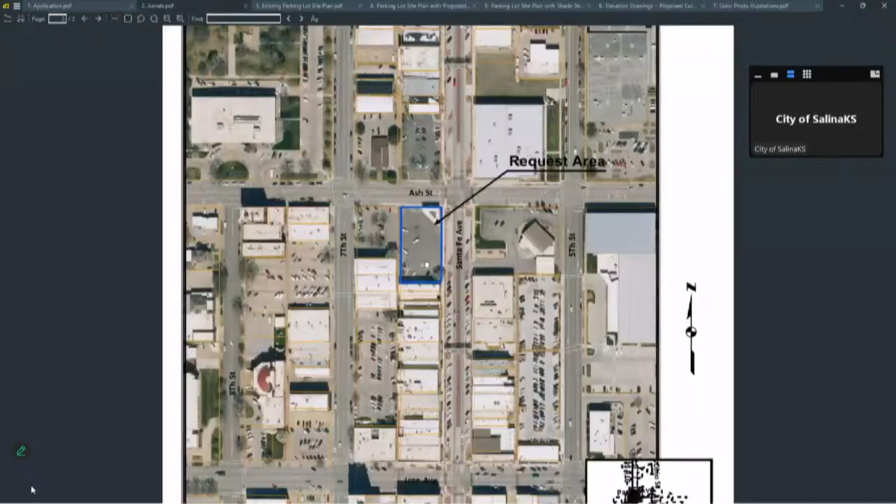The 100 block of North Santa Fe was formerly occupied by buildings from Iron Avenue north to Ash Street. In the early 1970s, the Salina Urban Renewal Agency began acquiring the buildings, and the buildings at the north end of the block were demolished in 1973. In February 2002, the Salina City Commission authorized the city manager and city attorney to negotiate a real estate exchange agreement with Sunflower Bank, which allowed city-owned surplus property at the northwest corner of Belmont Boulevard and Ohio Street.

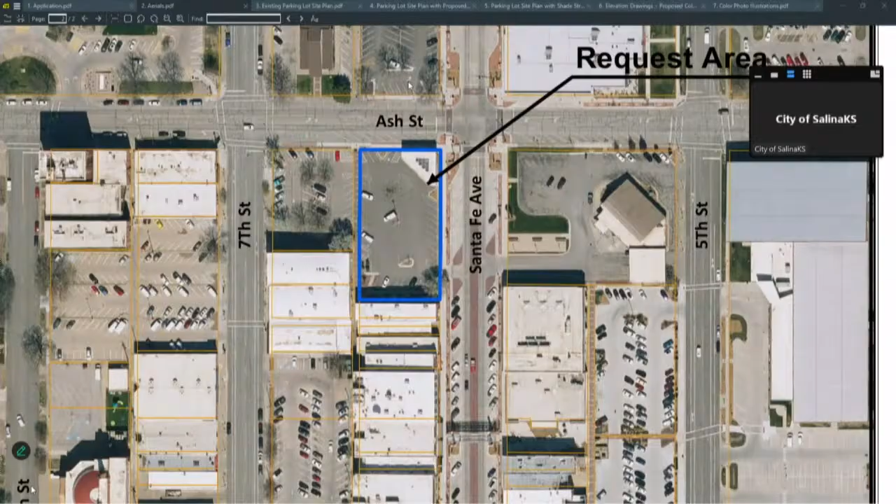for the Sunflower Bank owned parking lot at the southwest corner of Santa Fe Avenue and Ash Street. The surplus city-owned parking lot is now part of the parking lot serving ComCare, and this parking lot is now owned and maintained by the city. The City of Salina Engineering Division submitted a certificate of compatibility application in the fall of 2021.

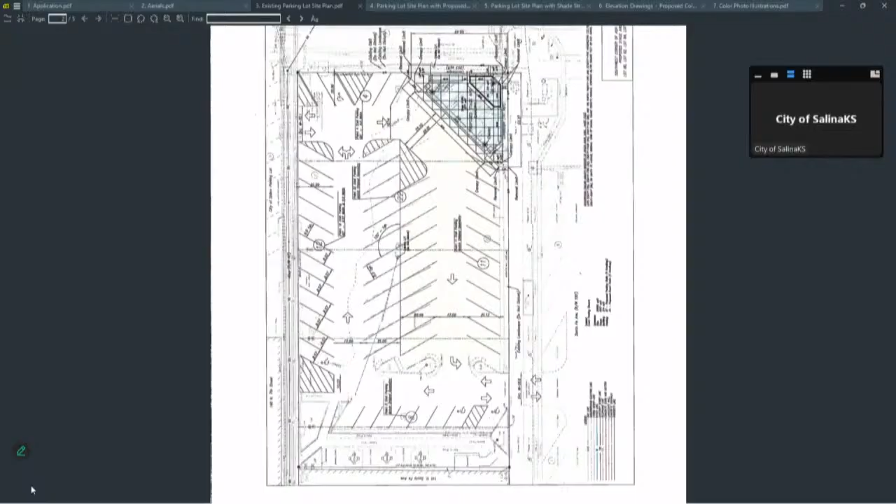The application and plans submitted to the Design Review Board proposed the removal of the Campbell Plaza stage and relocation to what would now be known as the City Light Stage at the location of this parking lot. Plans included an elevated concert stage and a storage building that was incorporated into the stage structure. The Design Review Board approved the relocation of the Campbell Plaza stage on October 14th, 2021.

Since the relocation, the City Light Stage parking lot has become a location for special events, including Salina on Tap, the Salina Farm and Art Market, and the post-race event for the Crossroads Marathon. The City Planning Commission met in March of last year and considered a request from Leslie Bishop on behalf of Salina Downtown for approval of a special use permit to allow a weekly open-air market or farmers market to be located and operated in the parking lot.

The board approved that request 7-0, and the Salina Farm and Art Market has operated from the City Light Stage parking lot for the last 2 years. Salina 2020, the master developer for downtown Salina, is proposing to make substantial and permanent improvements to the City Light Stage parking lot. The parking lot is located on the southwest corner of Santa Fe Avenue and Ash Street.

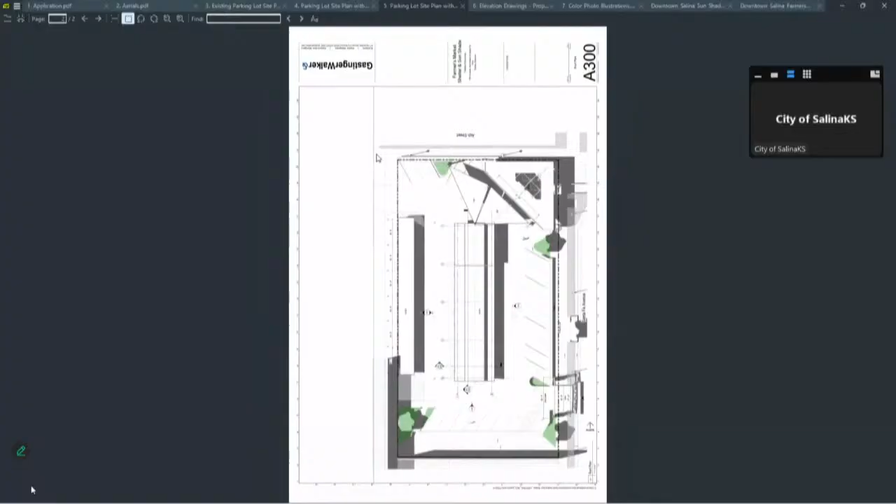The parking lot serves as the congregating area for events taking place on the stage, including the farmers market and other special events. We will cover the proposed improvements in more detail as part of our staff analysis, but on pages 4 and 5 you will find the design guidelines and the references they make to the proposed improvements, which we will go into in more detail as part of our staff analysis.

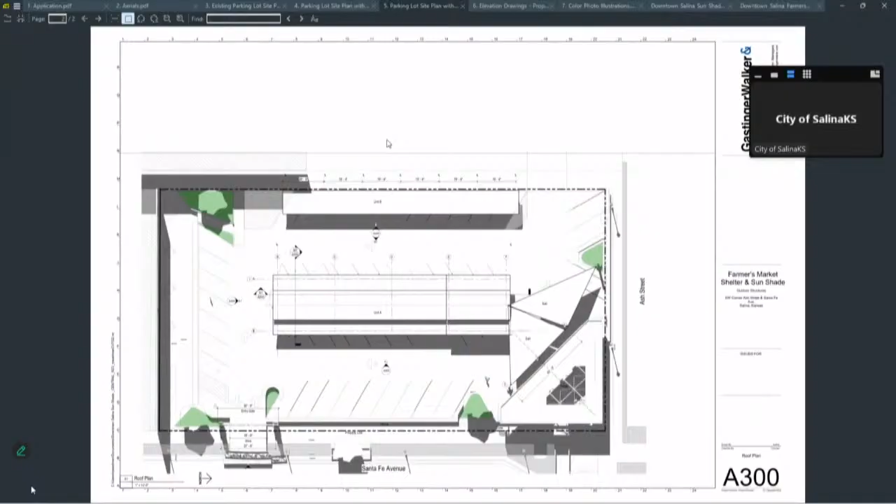Starting on page 6 of your staff report, I'm going to attempt to go through each part of the project individually, and then if you have any questions, we can cover those at the end. We'll start with the shelter structure. The largest improvement being proposed as part of the project is the installation of 2 steel shelter structures. Structure A, located in the middle of the parking lot, is 115 foot by 26 foot, a 2,996 square foot structure located in the middle of the parking lot.

The structure will be 15.5 feet tall in the center and 9 feet tall at the eave of the structure. The structure will be constructed out of steel.

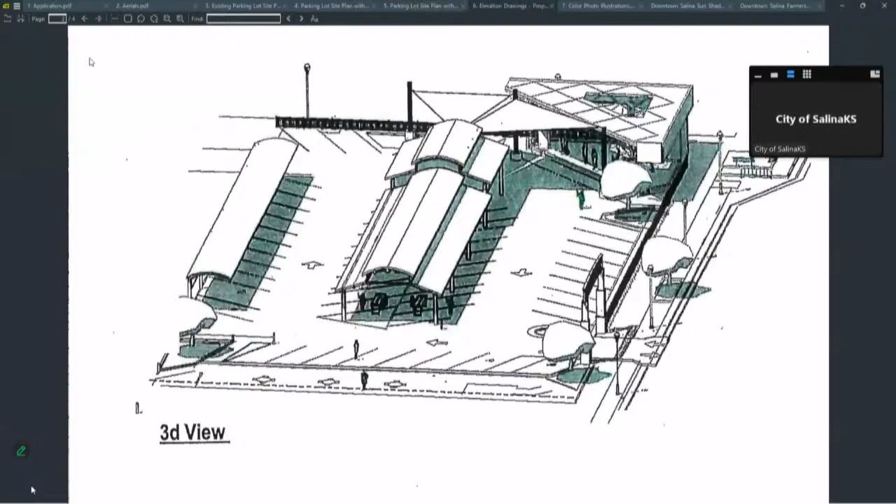The structure will be a green-blue color and will have a curved roof that is green on the exterior and wood material on the inside of the roof. Under the roof will be 4 fan units, as well as a series of wall-mounted lights, including...

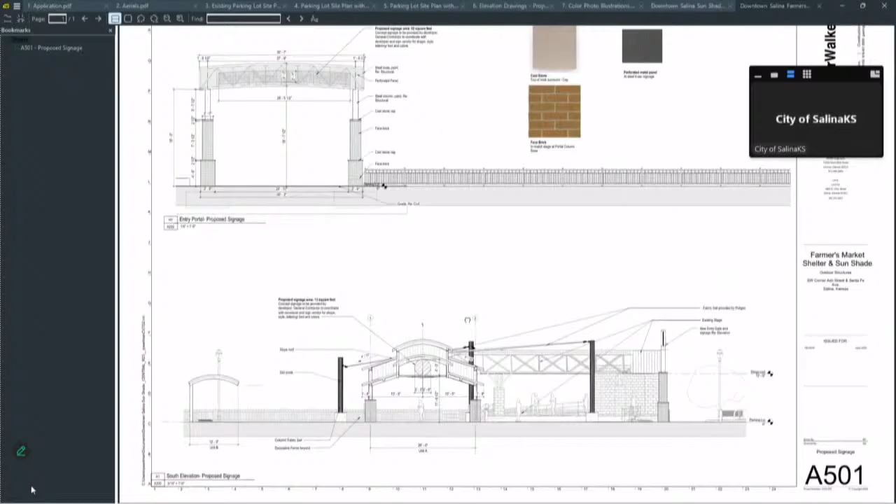18 8-foot-long rectangular lights and 24 cylindrical lights. Structure B is proposed to be a cantilever design structure that is 119 feet by 12 feet, or 1,428 square feet, located along the west portion of the parking lot adjacent to the alley.

The structure is proposed to be similar in color and configuration to Structure A. Structure B will have 5 lights located on the underside of the structure.

Following the packet being sent out, further conversation with the applicant and engineers ensued, and the applicant has indicated that with the cantilever structure being 12 feet in width, they are hopeful that the support pillars can be small enough to fit on the far...

That's the east side, the far west side. Far west side of the parking lot, and that they will not encroach into the alleyway.

The applicant has indicated that if they find the support structures do need to be modified, the cantilever nature of the structure may change, but the general design, lighting, and materials will remain the same.

The applicant has also indicated that the support posts of the shelter structure will have brick and cast stone bases that further complement the entry portal, as well as the materials used on the City Light stage.

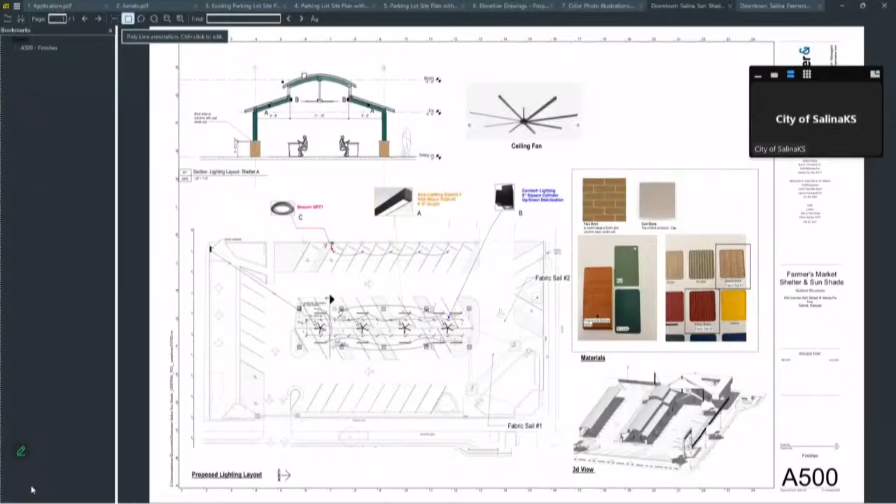Originally they were just going to be what was provided in your packet, just the metal structure all the way down to the ground. Ms. Kitchen has since indicated, as you can see in the top left of your screen, that they will be brick and stone at the base of the structures.

Next, we'll talk about the fabric shade sail structure. The second element of the proposed improvements is the installation of 2 overhead fabric shade sails to be located between Structure A and the City Light stage.

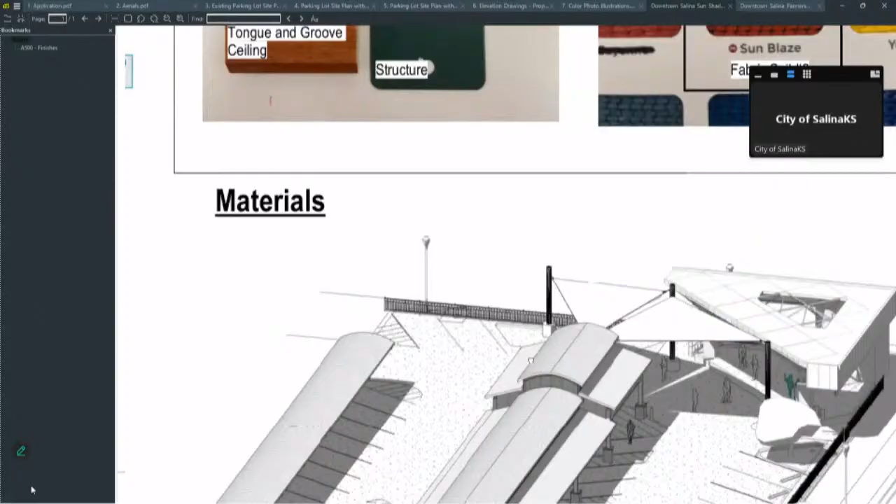The fabric shade sails are intended to shade the sun for performers on the stage and provide further location for people to congregate. The sails are 19 feet in height and will be a dark red and light brown color, respectively.

The sails appear to be compatible in color and scale to the rest of the elements currently installed and proposed for the City Light stage. The sails would also provide another point of gathering for pedestrians using the parking lot and would appear to also provide an element of shade for those using the stage.

In our staff report, we requested that the applicant provide more information on how the fabric sails will weather, and the applicant indicated that in order to preserve the fabric, the sails will be removed in the wintertime and put back up during the spring, summer, and fall months.

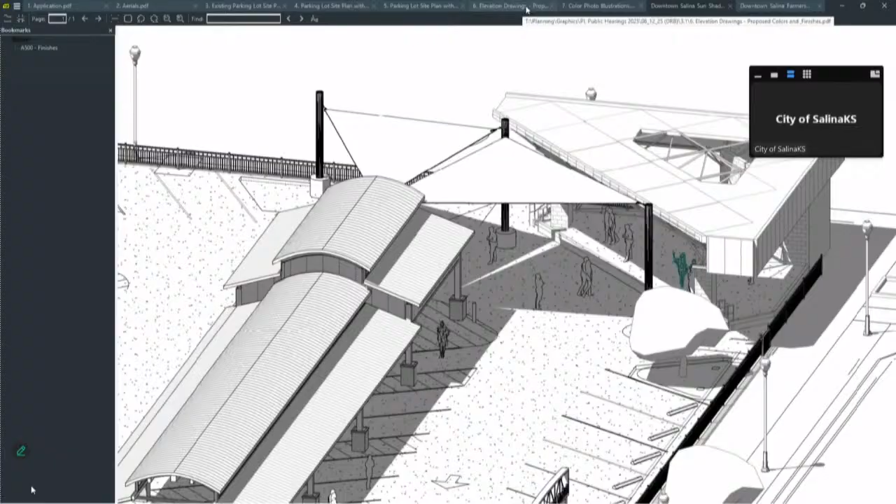As part of this project, the applicant is also proposing to install a black wrought iron fence around the perimeter of the parking lot. The fence will have 2 decorative pedestrian gates on the north and east sides of the lot.

There will be a 30-foot or 24-foot without the pillars of the entry portal opening for a new proposed entry portal located over the existing curb cut on North Santa Fe.

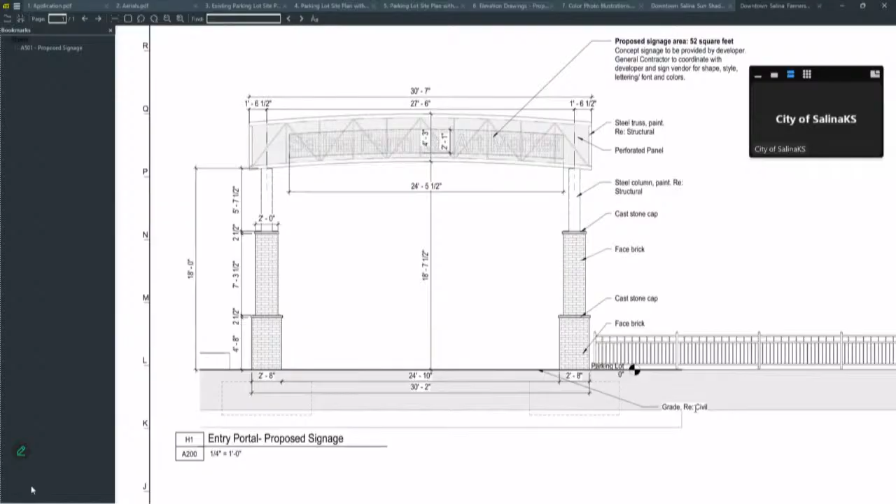The fence appears to be similar in color to the fence used at the KU Nursing School across the street, and the fence will additionally help further enclose the space, which can help facilitate more intimate events and gatherings.

Next, we can talk about the entry portal. The applicant is proposing a new metal and masonry entry portal over the parking lot entry off of Santa Fe. The entry portal will have a masonry base on either side of the entryway with a black metal archway extending across the entry to the parking lot.

The archway will have a space for a future entryway sign, which we'll talk about in our next section. The proposed entry portal is 30 feet in length, and if you subtract the size of the brick pillars, it would be 24 feet in length and then 18 feet tall.

The masonry and metal materials, again, appear to be similar in character and design to that of the existing stage and that of the proposed base of the shelter structures. The entry portal does not appear to interfere with entry or exit, as it extends well past the current curb cut.

Currently, next we'll go to signage, and we'll stay on this graphic as well. Currently, the applicant has identified locations where future signage could be placed. The applicant has since provided information on the proposed signage.

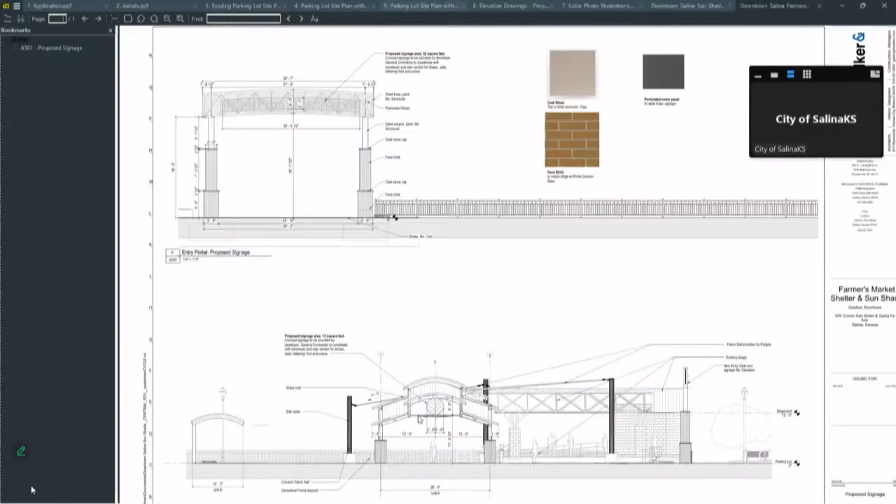Number 2, the applicant is proposing 2 circular panel signs to be located on structure A. The signs would be 13 square feet in size and would again be similar in material and design to the proposed renderings, and they would also not be illuminated.

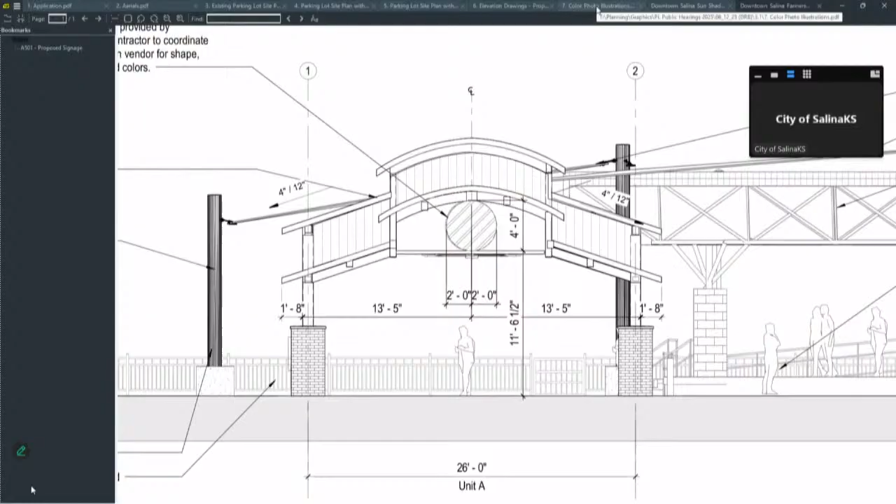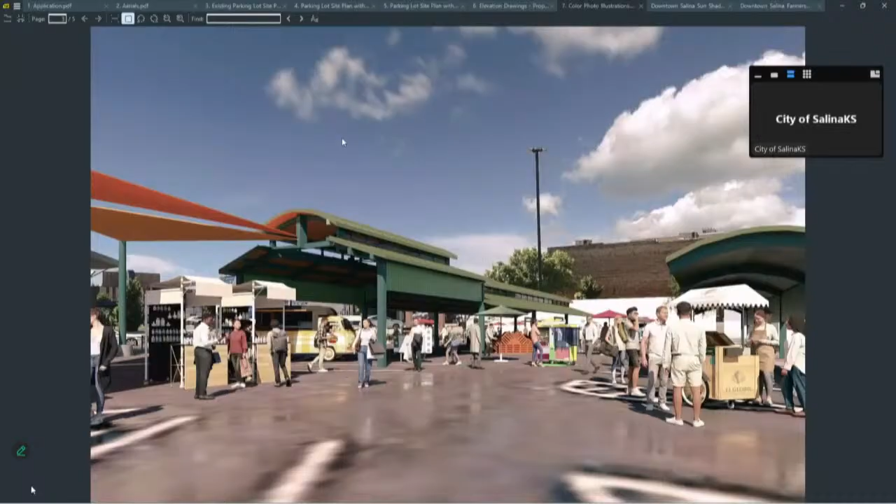As proposed, the total sign square footage would be 78 square feet, which is well under the 342 square feet allotted for this property. If the board wishes to approve the signage as part of today's proposal, staff would feel comfortable with the condition that if there are any significant changes to the proposed signage, whether the material drastically changes, whether they were to be illuminated, or the size were to change, that they could be brought back to this board at a later date. But it would be your discretion, and we feel comfortable with the details Ms. Kitchen provided that the signage could be approved as part of the application today.

Just to clarify, are those circular signs, one at the south end facing south, the other one's at the north end facing Ash? Correct. They would be on either end of structure A, as Dustin's pointing out on the screen.

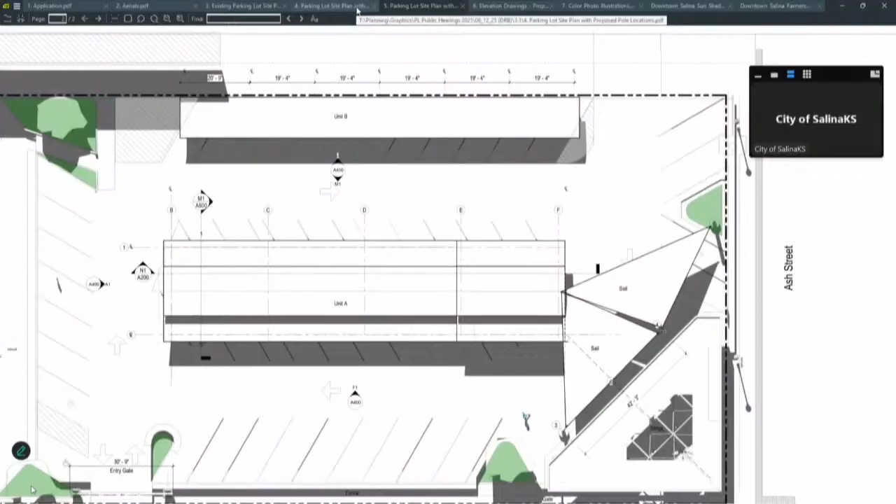And the last thing we'll talk about is the parking lot configuration. The existing configuration and layout of this city-owned parking lot provides 57 marked spaces. As proposed, this will still be a multi-use public space with the parking lot use continuing when the lot and shade structure are not in use for special events. Due to the design and location of the center shade structure and the location of the support columns, the number

of parking spaces in the center row of stalls will be reduced from 22 to 15 stalls, but these stalls will be covered parking spaces. The current plan is to maintain the parking stalls along the west edge of the lot, with the loss of one space for the cantilever structure of Structure B. The plan is subject to change. However, the applicant has indicated that with the smaller supports needed for a slightly smaller structure, the hope is to retain all of the parking spaces to the west except for one space.

So in review of the project for compliance with the design guidelines, it appears to staff the following findings can be made to support approval of the proposed improvements to the citywide stage. The design and materials of the proposed shade structures are consistent with their intended seasonal use and will not negatively impact the character of the surrounding area.

The proposed shade structures will be visually compatible with the existing citywide stage. The proposed shade structures will be compatible with the buildings adjacent to the intersection of Santa Fe and Ash as to style, height, scale, materials, and setback.

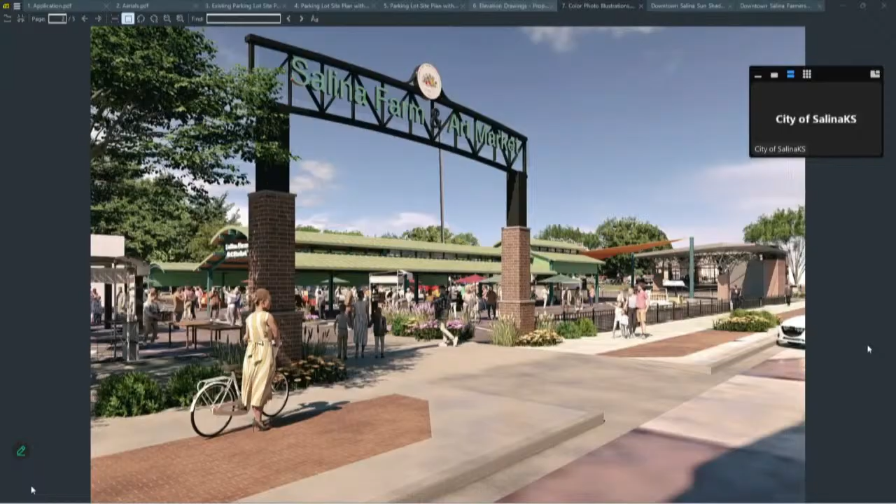In this current design, as proposed, I've spoken with the manager of facilities for the city to go through what is needed. On the electrical side of things, we have designed the lighting, the fans, everything to be customizable, with dimming capabilities, timing capabilities, so that the city and or a user in the space can set up the space how they need it to work for them.

Also on the sails, as indicated, it's really pretty simple—just yesterday with the facilities, we showed them the attachment process. It's a very simple carabiner-like structure to come off and on, so for them it would be a very simple step to do. On the cantilever structure, as Gage indicated, until we have a few more answers, we're hopeful that this will work. In a worst case scenario, we may or may not need some supports on the eastern part of that, which would require the loss of a couple more spaces. But we're hopeful that this amended design will work with that piece.

Related to some of the public comments that came in, I just wanted to speak candidly about a couple things. One of the comments was about having more fabric shade, and as indicated, we felt like that would put a lot of work on maintenance by staff, and we were trying to minimize that. The other part is that the public comment also said having more shade—if we add more shade, we lose more parking. So this is trying to find a balance that works for all people involved.

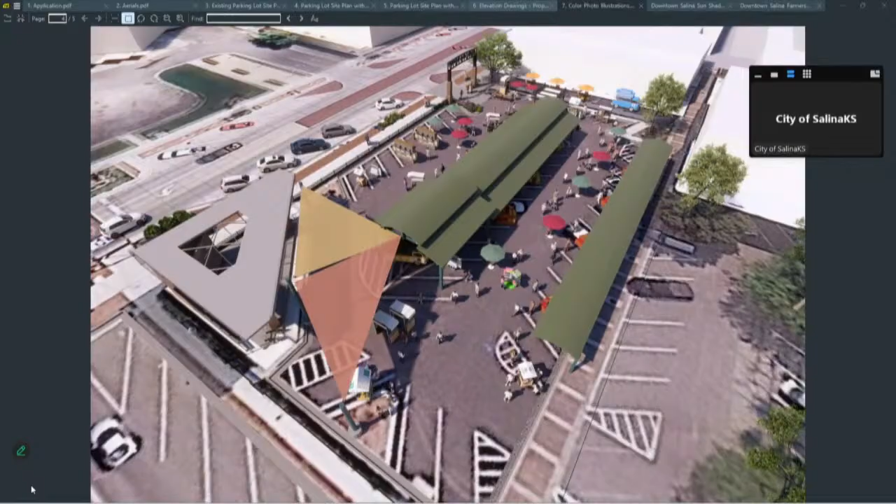It appears that the sails aren't attached to the structure. It is attached to the structure in one spot. We had to have conversations about the structure, and the footings on that side have been over-scaled in anticipation of handling any wind pull from those sails. The other points near the stage and the north side of the parking lot are giant pillars that will be standalone, that they'll be hooked to. So down the road, if someone wanted to add more sails, they could, but I would say at the cost of losing additional parking stalls.

I know you've been working on this for a while, but it may be worth looking at whether you can attach sails to the structure in one piece, if it's not too much change to beef up the footings everywhere to give you that option. I don't know if it does, it may not - I'm not the architect or engineer, so I couldn't answer that. I'm just thinking, two years down the road, you wish you could have that option for some of those things that will have sails at that point in time. Yes, I hear you, and I will definitely ask that question.

Is it correct, looking at the renderings, that there will be movable shade structures in the form of umbrellas overhead? So is that a possibility? All of the fun, extra colorful things was just the gentleman we contracted to do the rendering showing what it could look like. So it is a possibility to provide shade that's movable? Yes. If Salina Downtown wanted to invest in movable picnic benches or whatever that looked like, there's nothing that stops movable shade from entering the space.

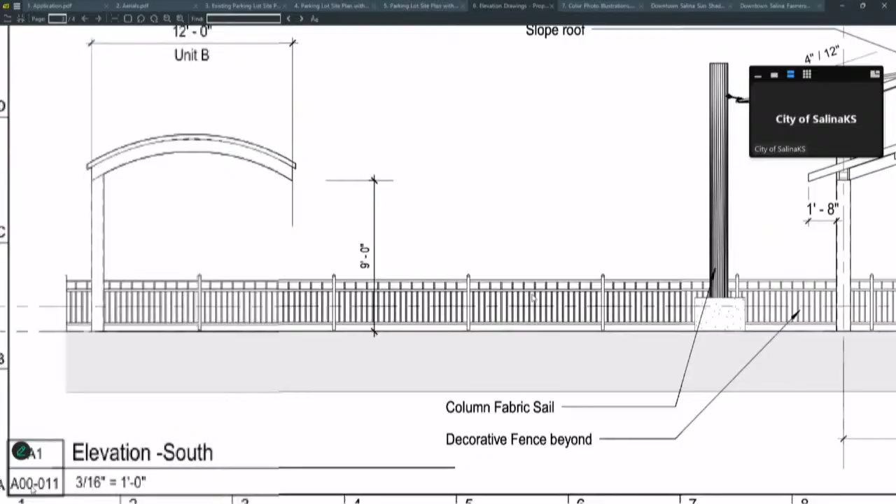Do you know how tall the fence is? It looks fairly low, like 3 feet maybe. We are sourcing from the same vendor that provided fencing at the Yaya's patio, so it would be a very similar height, probably 36 to 40 inches tall. Our sidewalk dining fences downtown are either 36 inches or 42 inches, some of them 42 inches tall - about 3.5 feet.

Speaking on behalf of the Crossroads Marathon, I get both sides of the design. The fence assists with defining a space, so I like that aspect, but it will be very restrictive when you've got 7 or 8 or 10,000 people downtown coming in and out of there - you have some choke points. Not saying I would change it - I do like the fence, and that's one event, so that's a personal side of things. I don't know if I'd change anything, but that will be a consideration - how much it restricts people going in and out.

I agree with you. And the other thing I would say is that it's all landscaping beds there, and there has been issues with people walking across the landscape beds.

So this will actually protect those by forcing people. There is a gate that we've added in the design near the stage where that sidewalk is, and then it will remain open all to the left of the entry gate. So if someone came in the 67401 patio, that whole length is an entrance and exit point, is what I would also point out. It also prohibits the runaway child at the Farm and Art Market from heading onto Santa Fe, which I appreciate very much.

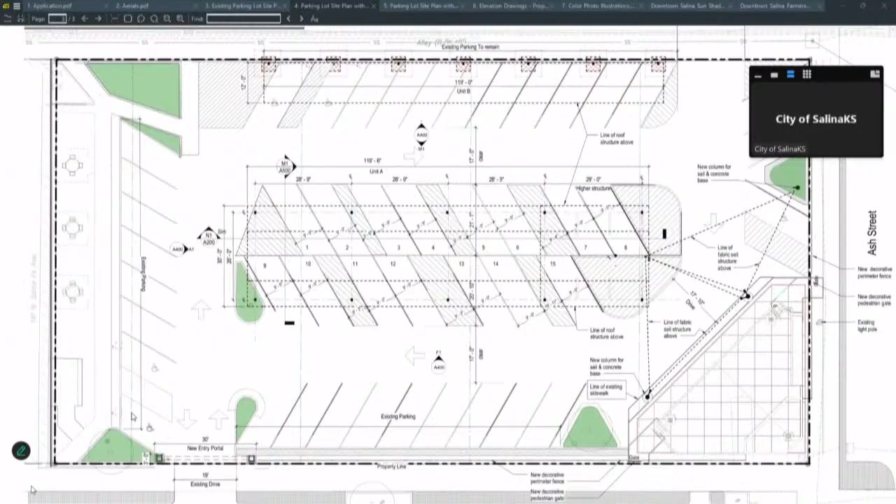I have a question with the public comment section. Drainage and ice hazard mitigation - that wouldn't be any part of this project? I didn't address that because that is not related to my project. Perfect, I just wanted to make sure. Yes, awesome.

Yeah, and I was going to comment that the public comment urged the board to consider extending the French drain system. That would not be this board's purview or responsibility. Just for your benefit, farther to the south there have been issues both with drainage and also in the wintertime. We get a lot of building runoff into the alley. The alleys aren't really designed to just convey water straight north to Ash - none of the water really reaches there. So the conclusion was to try to create slot drains or a French drain system in the alley so the water that comes off buildings would percolate down there, not flow down the alley. So I think they're saying that needs to be extended farther north behind the buildings that extend to the north, and that would be something we'd communicate to our Public Works Department, but it would not involve this board or Salina 2020. That is a city alley and a city project.

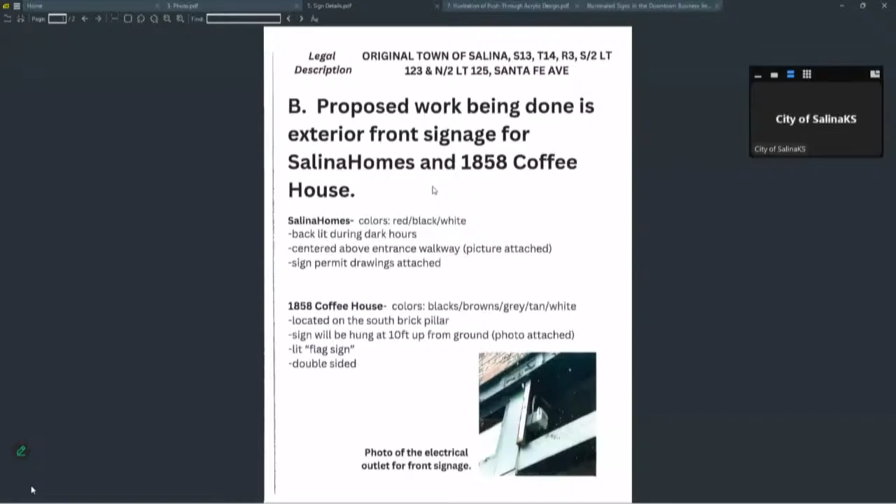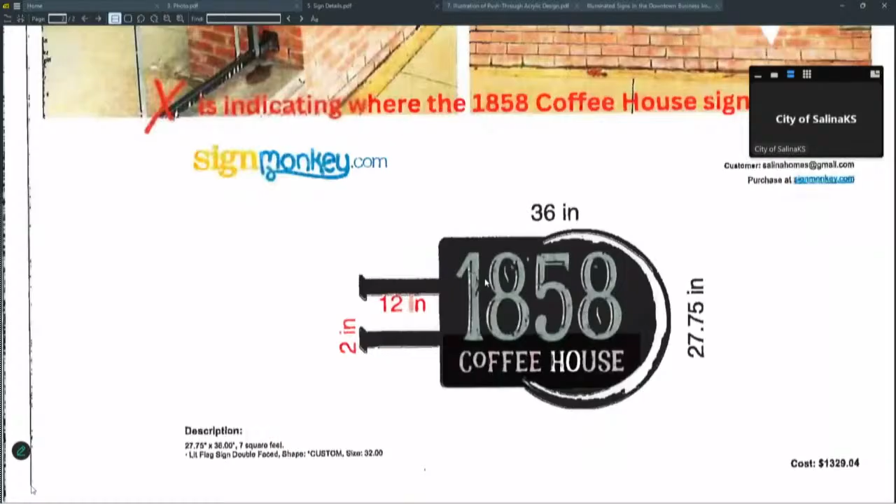This is the sign that's up. We also put in the packet the sign elevation that you reviewed on January 25th, 2024, a copy of the minutes from that meeting, and an example of a sign where we worked with the manufacturer and owner to have only the letters illuminated, not the whole sign face.

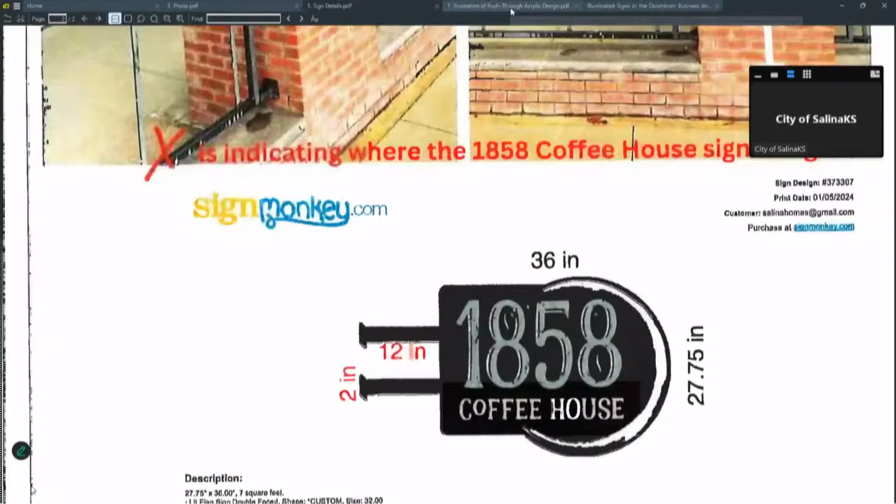So we'd want to give Mr. Welsh a chance to address the board and acknowledge that we as staff need to do a better job of having a meeting of the minds with board members and business owners who appear before this board, so everyone is on the same page about what is being approved. I'd be open to any questions about that.

After we hear from Mr. Welsh, we're going to run through some educational information for the benefit of the board — a piece we've put together that we'll try to include anytime a sign application comes before the board, and also make available to people wanting to install signs downtown as an informational handout. But first we'll hear any questions you have about the review of this sign, hear from Mr. Welsh, then present some information and get your feedback on whether it's useful.

Before we ask Mr. Welsh to come up and speak on behalf of this project, can you provide a little context to the 2008 guidelines on why this board discourages fully illuminated signs all over downtown?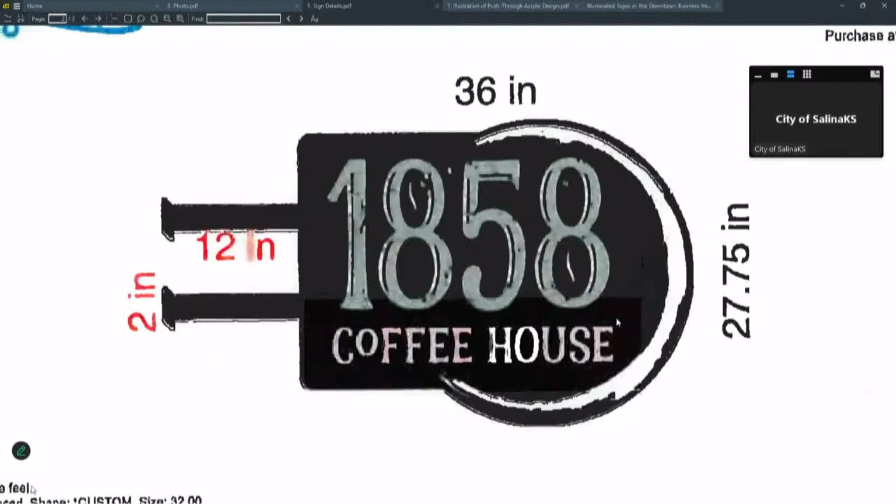And an explanation to the sign that you approved - didn't give that much thought either. I had designed the first sign that was all black, and it came to our attention by the sign guy that by putting it up there, that sign is very hard to see during the daytime with it being so dark. So they recommended going to a different sign, which they sent to us.

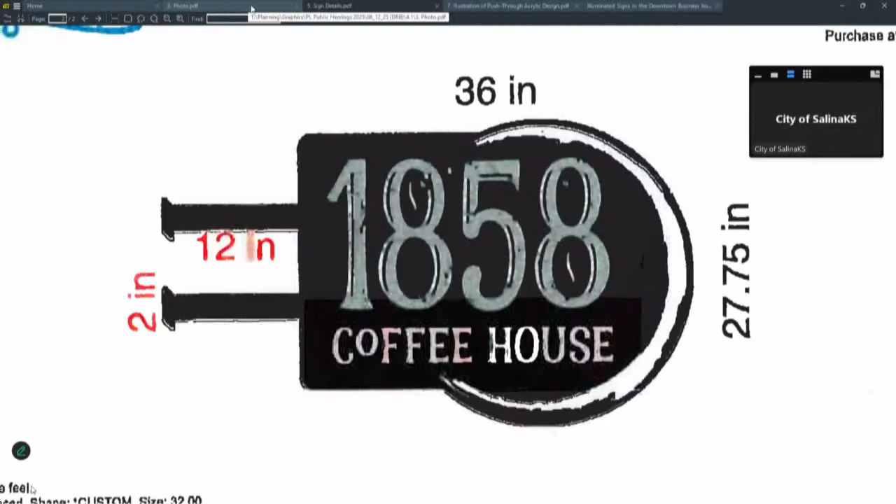And I said, hey, I'm not a sign expert, I'm hiring a sign expert. If you say that sign is very hard to see during the daytime, I'm going to believe you. So the square footage of the sign didn't change, therefore I didn't give it much thought. Again, I apologize - I was in the middle of trying to create a project in 4 months, and the sign was the least of my worries.

So as I stand in front of you today, I'm not going to ask for a variance. I believe the sign ordinance was put in place, and I understand there are many people in the downtown area who have come before this board and been denied based on a fully lit cabinet sign. So I made a phone call to the sign company - it's going to cost me just under $1,000 to put it into compliance. I'm willing to do that.

But the reason I came in front of you today is I'm hoping we can change the standard, or if it is that important, through city staff - and I know this board changes - it would help the public like me to put up 3 very distinct signs, and as the applicant, tell me which one of those makes sense. As I spoke to the sign company, they said, hey, we do this all the time.

He started mentioning halo signs, backlit signs, front lit signs, and perimeter signs, and I was thinking, how would anybody know? So the reason I kept this appointment was to say that the reason we got here and how we got here wasn't that I was trying to do something different. I don't think you think that. It's just how we got here. I didn't know the difference.

And I'd imagine the next person in front of you isn't going to know the difference either. I believe the city staff has given us some new policies they're working on, which I think will help the next person so they don't have to spend an extra $1,000 because we didn't know what was going on. So not your fault, not city staff's fault, just a misunderstanding of what's important in a sign downtown.

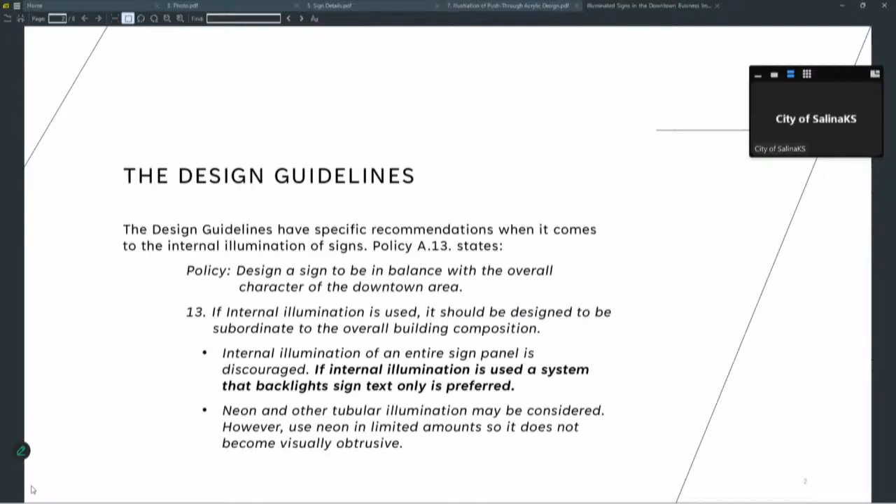So when Dean and I first had that conversation, we were discussing this specific term, backlit, and how that can create some confusion. So we provided, I think, 6 or 7 different examples of signage, and I could point to you, just in my last year here, 6 or 7 that probably have different ways of being illuminated but ultimately achieved the same goal. As staff continues to work on our staff reports, we will work to use the language as referenced in this presentation, and hopefully that can help clear up any confusion that might exist when it's brought to the board.

Ultimately, to Mr. Welsh's point, we want to be as informational as possible for the public, for the building owner, for the board, and for ourselves. So we will work to use that language and better clarify. We appreciate Mr. Welsh coming here today, this was a helpful exercise for staff as well. It's a learning experience for us, just how to do better, and we can't expect everybody to hear the word backlit and understand exactly what we're saying.

In this packet, I would encourage staff to be more clear on what's not allowed, because you can show me 100 versions of what is allowed, but be more clear on what not to do. I know the last page shows a fully illuminated sign cabinet, but it doesn't say don't do this per se—be a little more clear. Got it, and I will expand on that a little bit. That would be helpful.